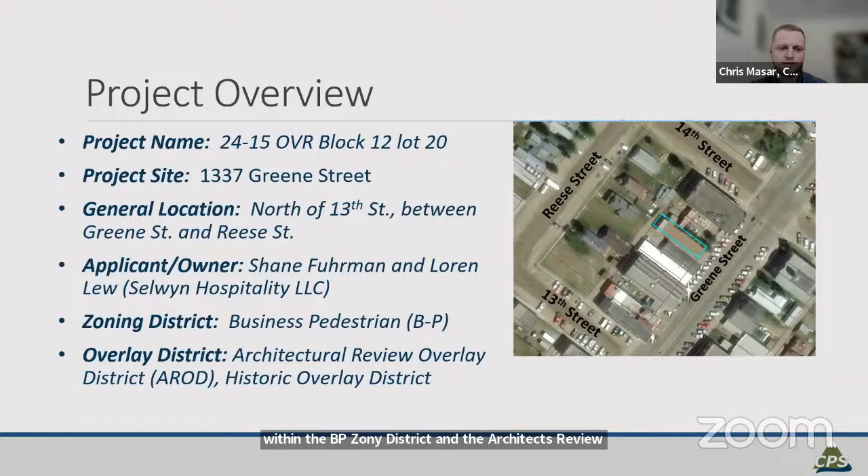All required documents and fees have been paid and it was properly noticed. No public comments have been received to date. The proposal includes exterior alterations on an existing historic structure.

The subject site is 2,500 square feet, and there is an existing single-story structure which fills the entire lot. The second-story addition will be set back 10 feet to preserve the historical front facade and header. The 10-foot setback will also be utilized as a second-story deck. The proposal also includes a new first-floor entrance on the north elevation to provide direct access to the hotel guests to the adjacent courtyard. The building materials include brick facade and vertically oriented windows, which match the existing structure.

This application is before you all tonight because any facade or exterior building alterations on existing structures viewable to the public require HRC review and approval. Additionally, the committee may add site-specific conditions of approval with the intent of retaining the town's historic landmark designation.

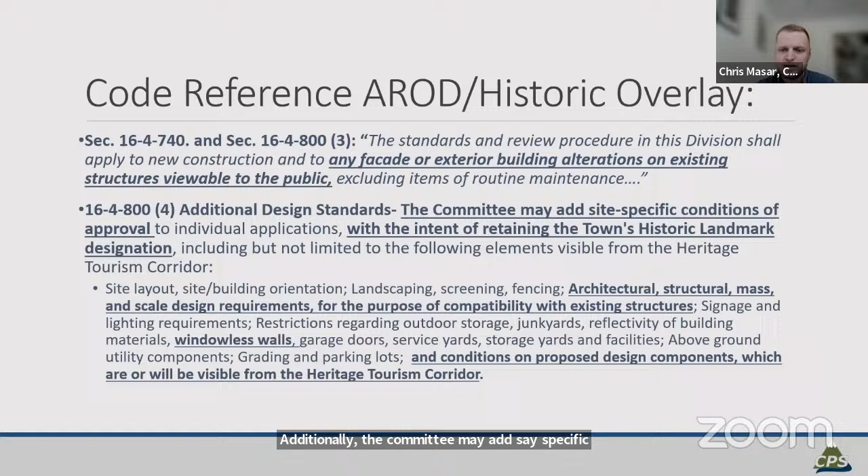Staff reviewed the application against the site-specific conditions and found that the proposed architectural, structural, mass, and scale are compatible with the surrounding structures. The application does include windowless walls. However, on the south elevation, the adjacent structure is located on the property line, and adding windows could impact the future development of that second story. The addition is also set back 10 feet from the front facade, which would help reduce the visibility of the windowless walls to the public.

Finally, the proposal includes a deck along the 10-foot second-story setback, which is unique to this structure. However, there are several other rooftop decks or second-story decks along Greene Street. Therefore, staff does not have any site-specific recommendations for this application.

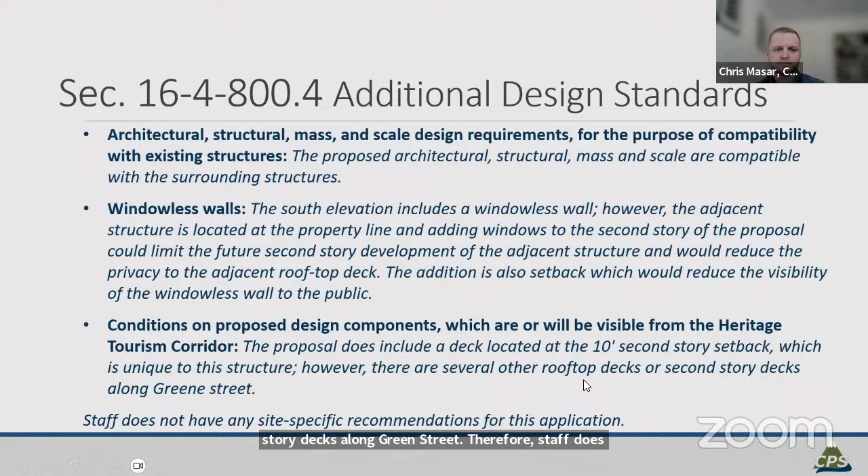Therefore, staff finds the applicant has submitted all required materials, and those materials comply with the conditions of Section 16-4-5 and 16-4-6 of the Silverton Municipal Code. Staff therefore recommends approval of the AROD and Historic Overlay District application for exterior building alterations on an existing structure located at 1337 Greene Street as presented.

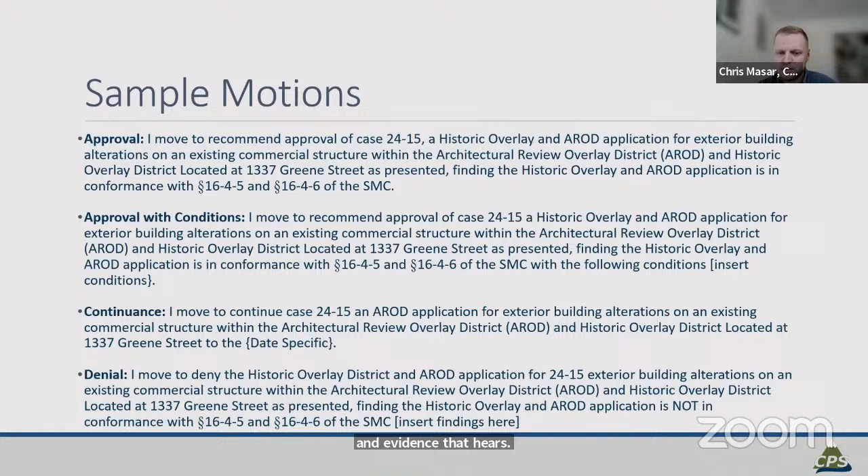However, this decision is up to the Historic Review Committee, and they may choose to recommend approval with condition, continue, or deny the application based upon the testimony and evidence it hears. This slide includes sample motions regarding the application, and these motions are also included in tonight's meeting packet. That is the end of my presentation.

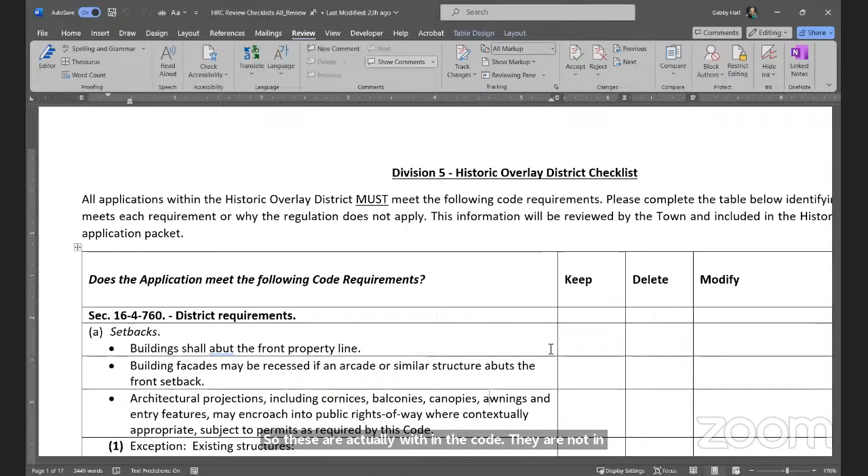So, make this bigger. All right. So the first checklist we have is just the standards for the Historic Overlay District. So these are actually within the code, they are not in the handbook. And so I just planned on letting you all kind of walk through this, and then I can mark keep, delete, or write how we need it to be modified. That way we can get these more on the right track for our next iteration of the land use code. So the first...

Regulations are related to setbacks. Any thoughts here? I'm good with 'building shall abut the front property line.' I don't see any issues with anything here in this first section. Anybody else? Nope. Okay, those are keep. Does that include this exception for structures existing before 2008? Cannot increase setbacks?

I say keep it. Agreed, I don't have a problem with that. Okay. Right. So now we have that.

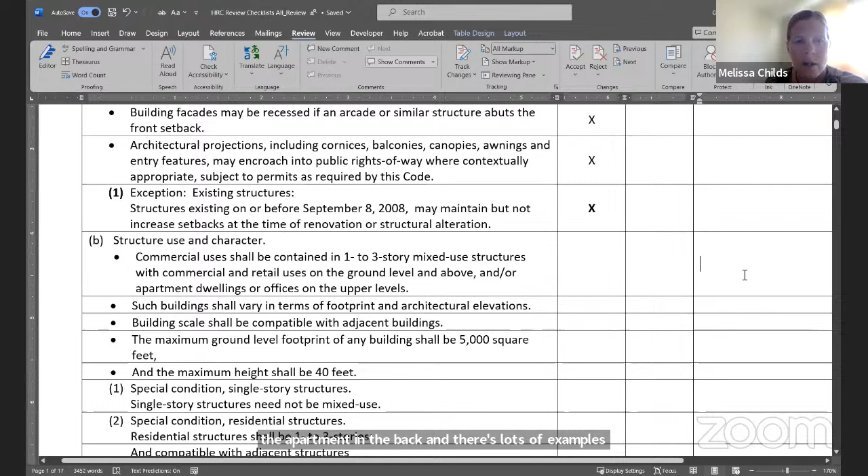I agree with that. I mean, it's very classical to have the store in the front and the apartment in the back, and there's lots of examples of this already in historic buildings. So I would say lose that. Okay.

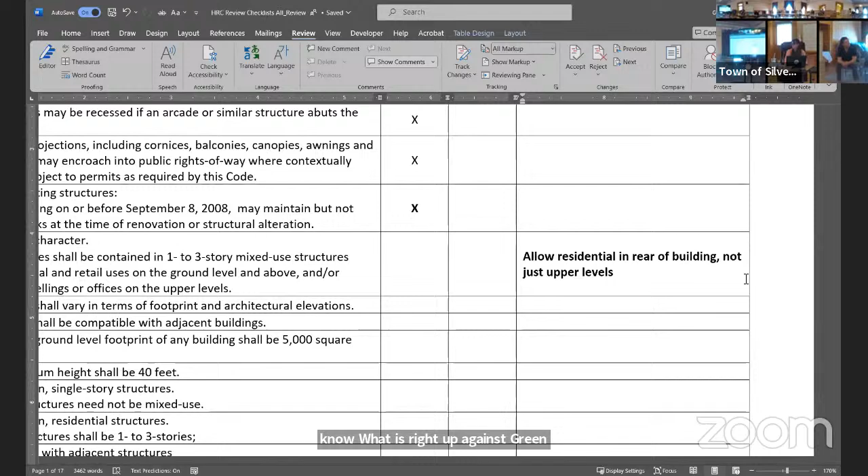Okay, but generally speaking, we do want to keep what is right up against Greene Street non-residential in the historic overlay district. Correct. Okay, Agreed. Okay. All right.

This is kind of a broad item here: vary in terms of footprint and architectural elevations, as well as compatible with adjacent buildings. I personally don't really understand the one about vary in terms of footprint. I don't really understand what that means. Such buildings shall, what, vary from their neighbors in terms of footprint and architectural elevations? But building scale shall be compatible with adjacent buildings.

I say lose that because there's some small little structures on Greene Street, which is our only BP zone, well there's a section of Blair that's BP, but the primary BP zone is Greene Street. And where else are we going to put our larger commercial buildings than on Greene Street? So if you have, for example, and I know of some, a 700-800 square foot home on Greene Street, and now somebody wants to build this amazing mixed use building that's adjacent, but now they're limited because of this rule. I just think we need to utilize our BP zone to its best and highest, and it's the only place for some of these larger mixed use buildings. And so I just don't think the scale shall be compatible with adjacent buildings. I'd like to lose that.

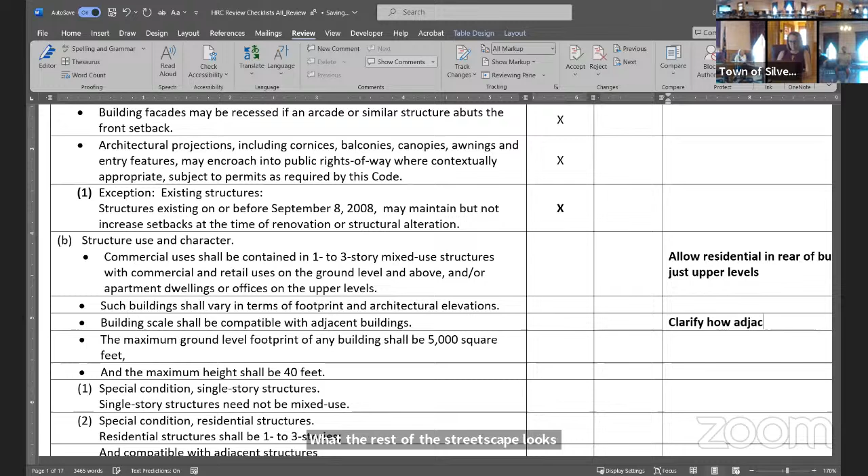So clarifying whether or not adjacent means immediately adjacent, or what the rest of the streetscape looks like, could be really helpful. Because if there is one little building but then two big ones, I think you end up with kind of a reasonable result.

And then the other concern I had is the mixed use requirement. For example, if you wanted to build a hotel that doesn't have a coffee shop or a bar, that would not be permitted. A single-story restaurant doesn't need to be mixed use, but if you had a 2-story coffee shop, like the Coffee Bear, it wouldn't be allowed as it currently is. So there's a decent number of examples where mixed use could be a problem.

That's a good point, Shane. Commercial uses shall be contained in 1 to 3-story mixed use structures. So thanks for pointing that out, because the Coffee Bear does have residential in the back, but you're saying this reads that you could not have just a retail store, for example, or just a hotel without a coffee shop. So I hear you and agree with you on that one, that you're mandating mixed use, which I question if that should be there.

Yeah, because I think there's a difference between saying you can't do a fully residential building versus saying you need an active ground floor space. And you could do that with a hotel, right? Like the lobby of a hotel is an active pedestrian space. So it doesn't mean you couldn't still keep the pedestrian oriented feel of Green Street if you allowed that. I don't know though, would you want a completely office building? As long as the offices had like a front space that was active, or do we need to reserve that for more retail and restaurant uses?

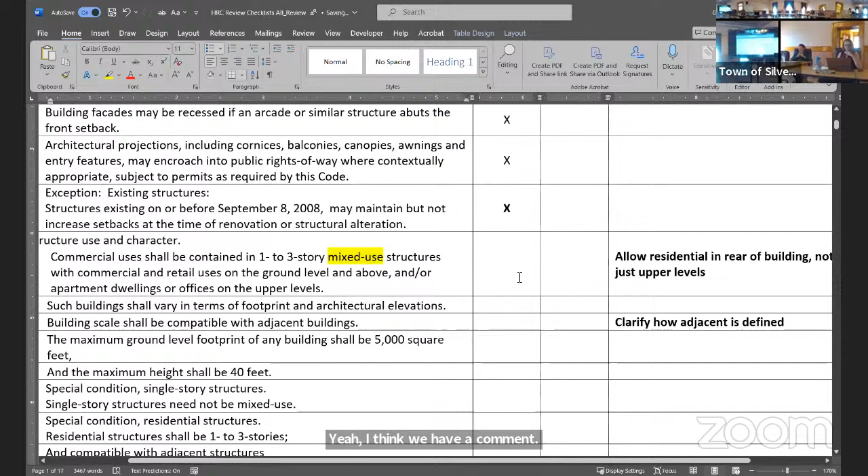I think it's a good discussion because as written, it probably does do what we want it to do, it sounds like, but the fact that it's taking this conversation to recognize that means that maybe there can be some more clarity added.

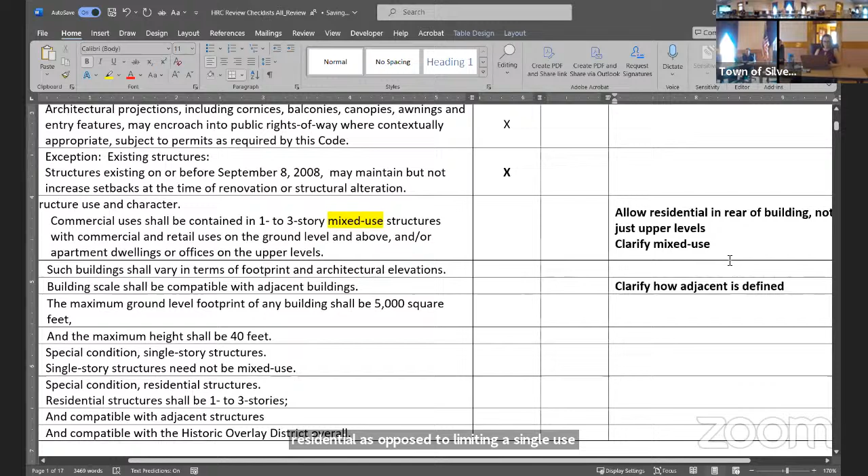I guess I do. I think the main intent was to not allow just residential, as opposed to limiting a single use of commercial. And so that's already captured in the BP requirements, I believe. Is that correct?

For the business pedestrian district - I know they're separate things, but what's captured within that? Like not a purely residential use. Oh, currently you can have a purely residential use in BP. You can't - yes, that's my mistake.

I agree that we could use some more clarity on that statement. Yeah, and that would just take away all these issues. Get rid of them. Okay.

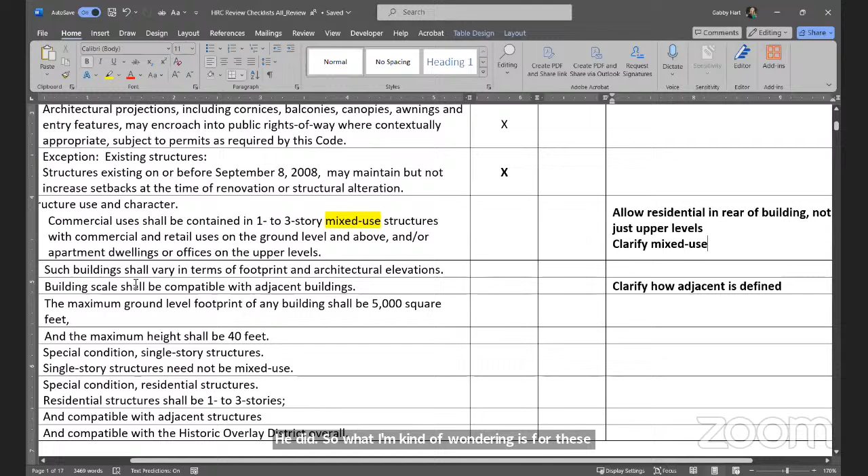So what I'm kind of wondering is for these two - in terms of footprint and architectural elevations and building scale compatibility - remember, we're in the sort of standards that are codified in the actual land use code. What I'm wondering is, are these things that are more so addressed via the guidelines, like the builder's handbook? Do we need to state this in these standards, or do they need to be fleshed out a bit more?

The question of what is compatible is a hard question to answer and usually requires some additional regulations, but as we move down you can see you're starting to get at building scale via your height limitation and this maximum footprint. I don't know if you guys have any thoughts about that. If we removed those, would you be comfortable knowing that those issues are addressed in the handbook? Would you rather they stay here in the standards?

And Gabby, can you quickly give a really brief overview of the difference between standards and guidelines? Yes, so your standards are the absolute, the shalls, versus guidelines are guidance - you don't necessarily have to follow them. You all as the HRC have the ability to use those guidelines to make your decisions and make suggestions and conditions and things, but fundamentally these standards are these set rules.

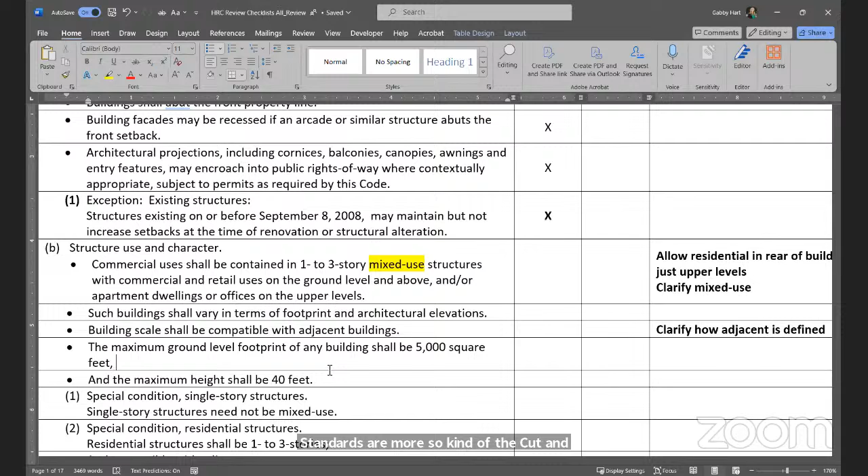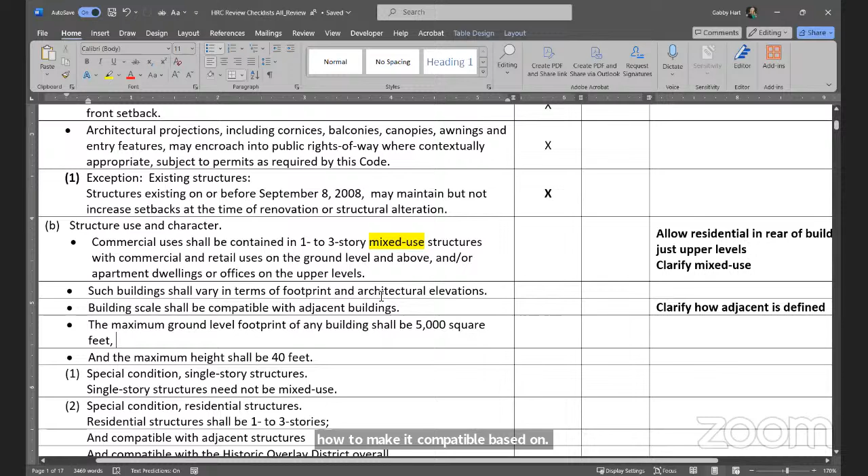And so oftentimes, especially when it comes to historic design, standards are more so the cut and dry dimensions or building form - things about mixed use, height, footprints - those would be standards, versus the guidelines would give you some options on how to make it compatible based on historic conditions. Is that helpful? Yes.

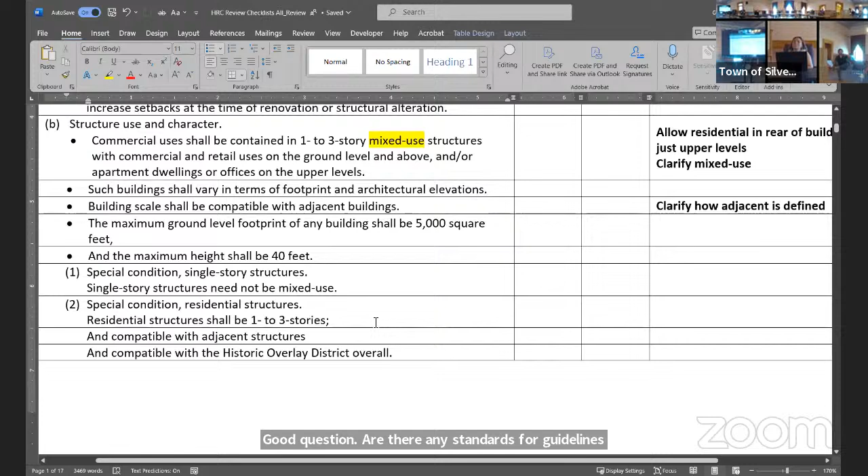Good question - are there any standards or guidelines that go towards becoming a Main Street community, or preserving our historic designation?

Yeah, Main Street Community is a San Juan Development Association kind of project. And then we have our historic overlay district, which is for historic preservation. And then we are working towards becoming a certified local government, which is kind of that next step to historic preservation that I think includes a lot of the things that are probably in your mind right now. So a big part of this code update is getting our standards and guidelines updated so that we can become a certified local government and implement these historic preservation principles effectively.

So a work in progress.

Are we ready to move down the list, maybe? Yep.

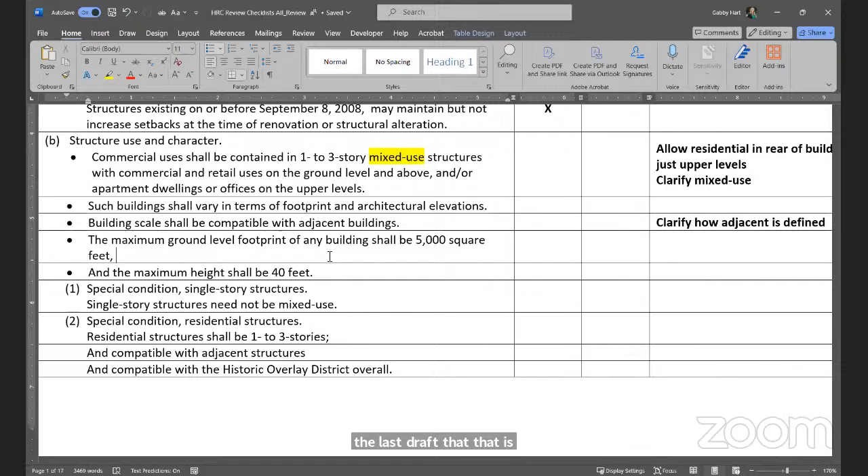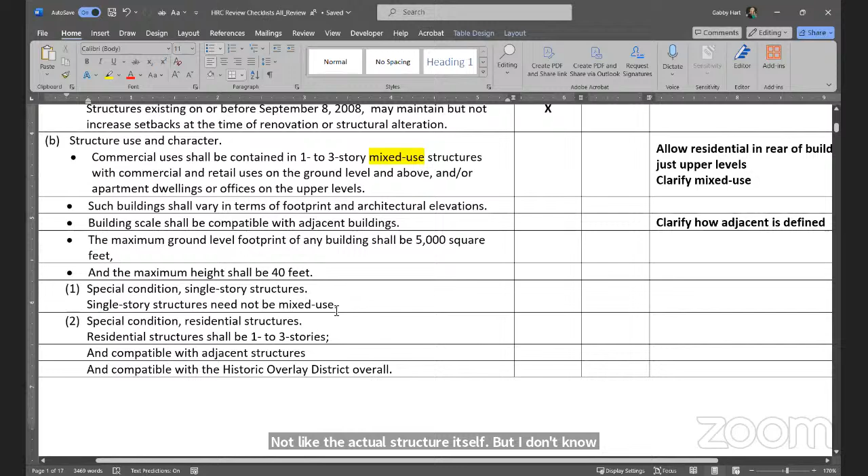This maximum ground level footprint, we did clarify in the last draft that it's related to a tenant space, because we understand that many of the actual structures, the buildings, are larger than 5,000 square feet. But if you wanted to keep that, we said the tenant space is limited to 5,000, not the actual structure itself. But I don't know if you're interested in keeping that restriction. Can you clarify that difference? Yep, so if you had a building with shared walls between each space, where they look different from one another from the outside, they're segmented, that's still fundamentally one building since it shares a wall.

So this was confusing because it said the ground level footprint of any building should be 5,000 square feet, versus we think the intent was more so related to each of those storefronts, each segment of a building, should be limited to 5,000 square feet in footprint, so that there's not one use taking up a decent portion of a block.

I think we've got another comment from Shane. Yeah, I was gonna say when we were first talking about this, we were just talking about building footprint, not limiting tenant space. For example, the Wyman's 10,000 square feet. The Bay Paul that we just approved is gonna be like 7,000 and change. The Grand is like 23,000 square feet. The Benson's way over as well. And there's a bunch of other properties that are way over 5,000 square feet for a single tenant.

And so I think - are you talking about this ground level footprint? Correct. Yeah, that's what we're talking about. Okay, so yeah, footprint - I'd say remove it.

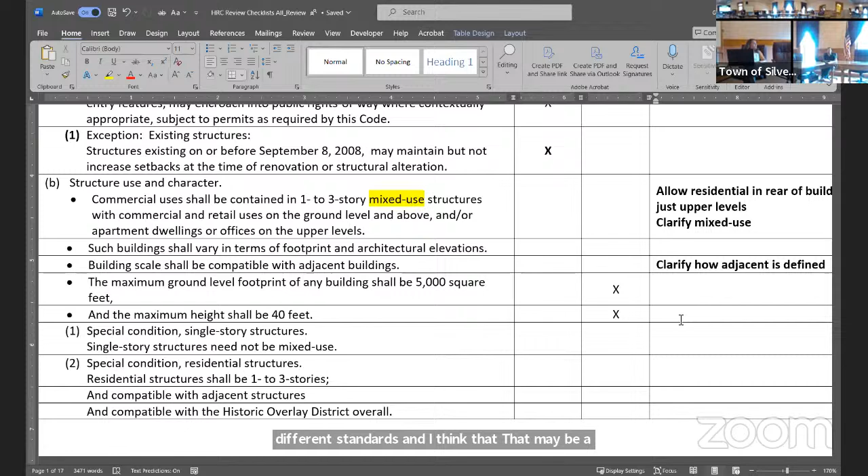I still do think that I totally agree—really tall buildings, even just by a little bit, can totally change the character. But I do think that we should seek alignment between these different standards, and that may be a bigger topic that doesn't fall within this right here. But if we want 40 feet, then I think it should say 40 feet across the board.

Yeah, and this is something that we can—we're bringing the full draft of the land use code, which will include these standards and the dimensional standards for all the districts, including the BP. And we can ask that question specifically about 40 versus 45 and get public input on it too, and see where it goes, and then revisit this based on that.

But I do think it makes sense to just follow the maximum height of BP. The land use code is still being drafted, so 45 is not a set number. That can come down, especially if we hear even more input about it.

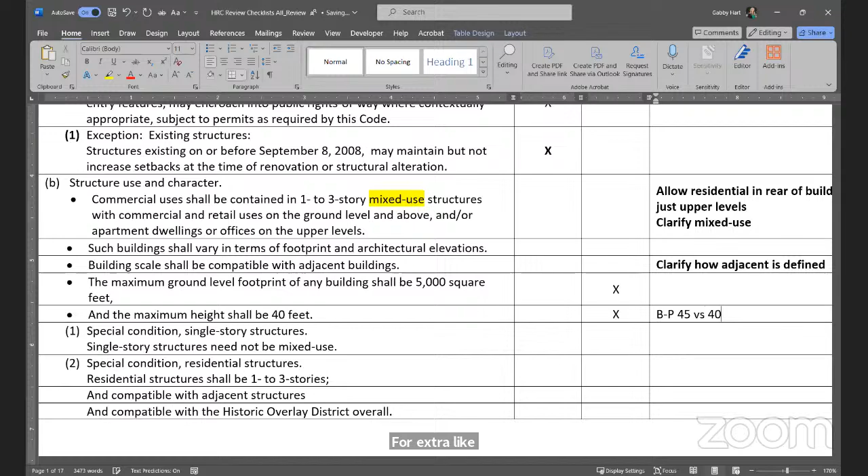So we'll flag that as the BP 45 feet question. We will flag that for extra input. Moving down the line here.

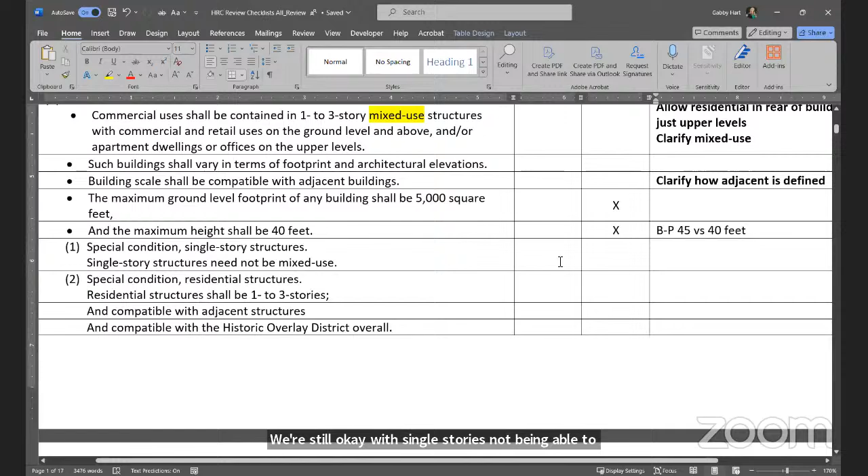We're still okay with single stories not being able to be mixed use, especially if we're not even keeping the mixed use distinction up there. Correct. Okay.

So for residential structures, one of the recommendations we have, also related to the BP district, is that single family detached is not an allowed use anymore.

So this is also a little confusing amidst any mixed use requirements you have. I guess the way to ask this question is, would you be okay with a completely residential building? So a duplex or a multi-unit?

I'm in favor of multi-unit. We obviously need as much residential as we can get. In Silverton, density seems to be the overall theme that came out of the compass plan, the master plan. So I definitely think a strictly residential building on Greene Street is okay. But I don't know that a detached single family is. I would say no to that.

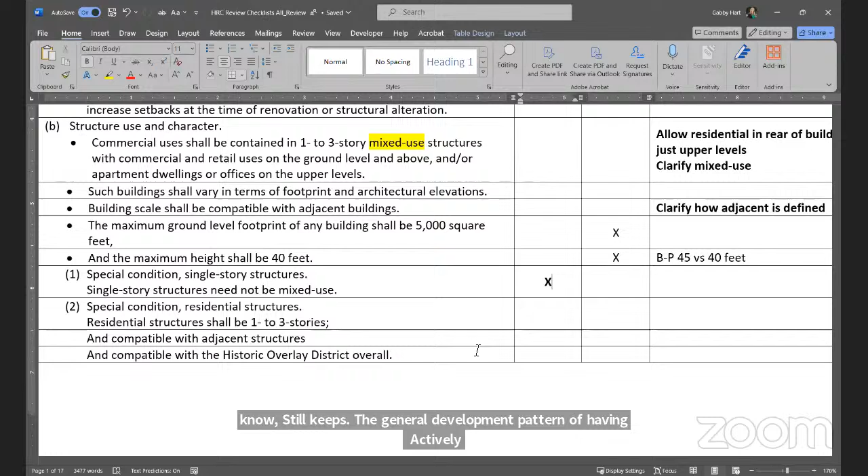But so the question we always kind of run into, especially on main streets, is: if you want to do a multi-unit building, should we at least have the ground floor be a leasing office or something that still keeps the general development pattern of having active use and in-and-out activity? Or, if this is your main space that you want commercial, and we're opening up opportunity for residential elsewhere in town, should you not be able to do an entirely residential building? You can do multi-unit, but the ground floor needs to be a coffee shop. That's the balance we're trying to find.

So I like the requirement of, now we're reintroducing the mixed use requirement, I like that a residential unit have some kind of pedestrian connection, commercial use on the main street there. So I'm okay with that. I guess what I'm not okay with is the detached single family unit.

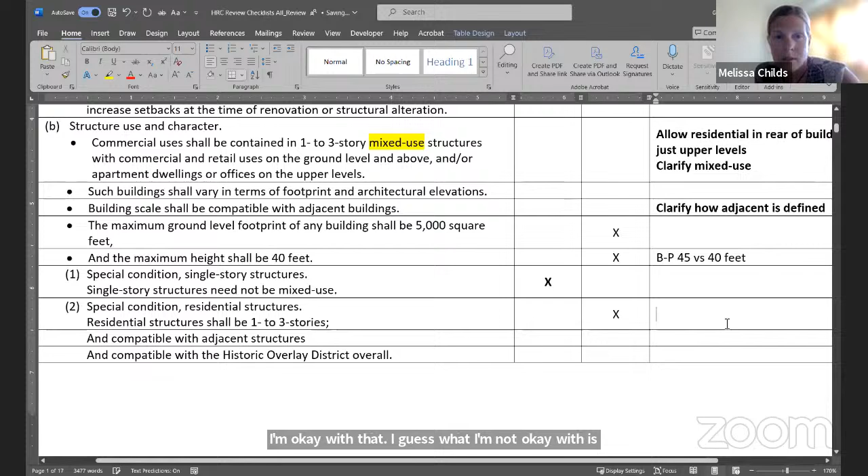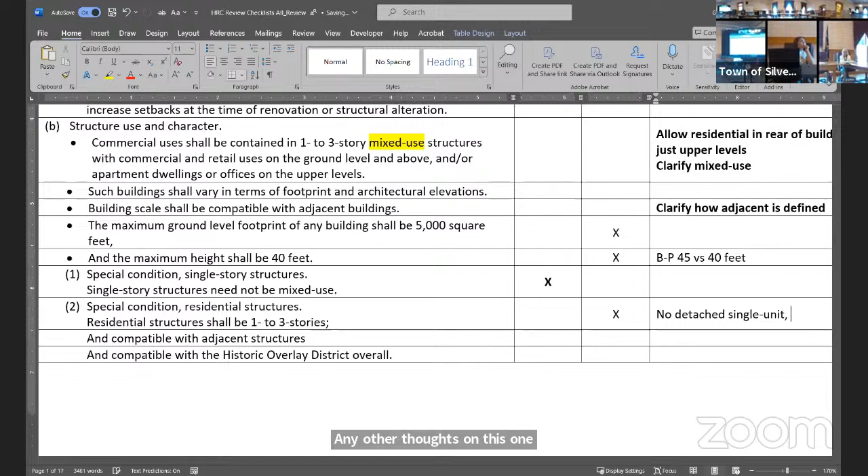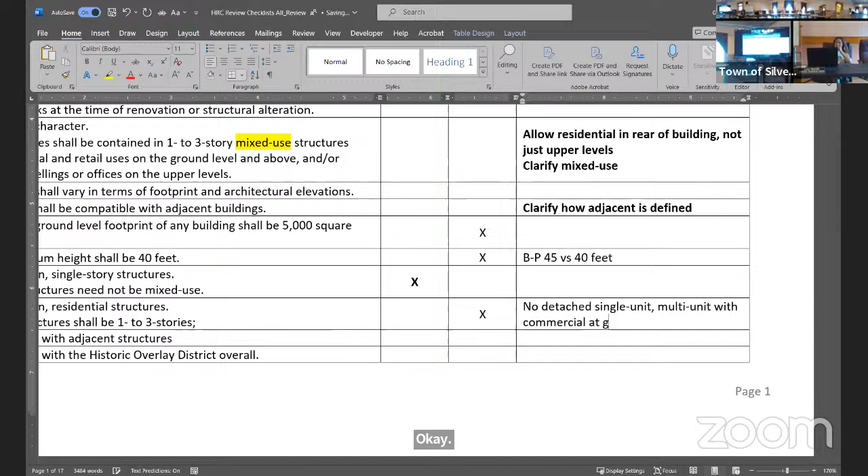Any other thoughts on this one? I believe it should be mixed use. Okay.

And then this is kind of repetitive, if we're taking this out related to residential structures, then these can also go. These are directly tied to this one.

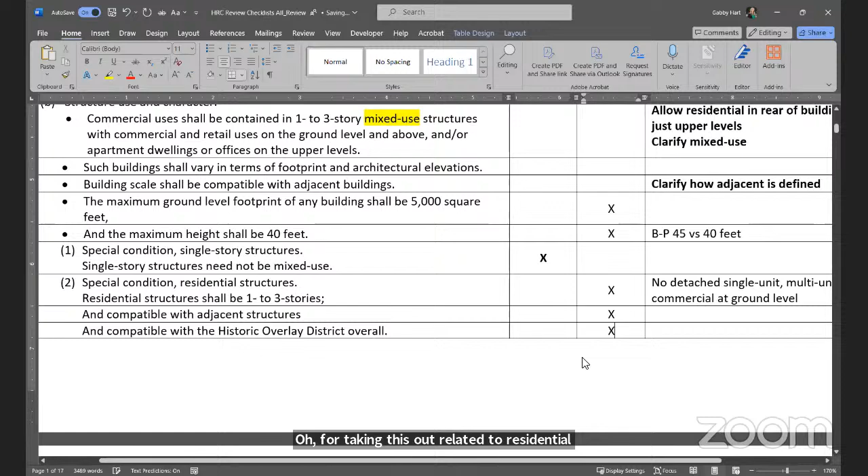So the next is facade treatments. This is the 25-foot articulation requirements.

I agree with that. Somebody explain that to me.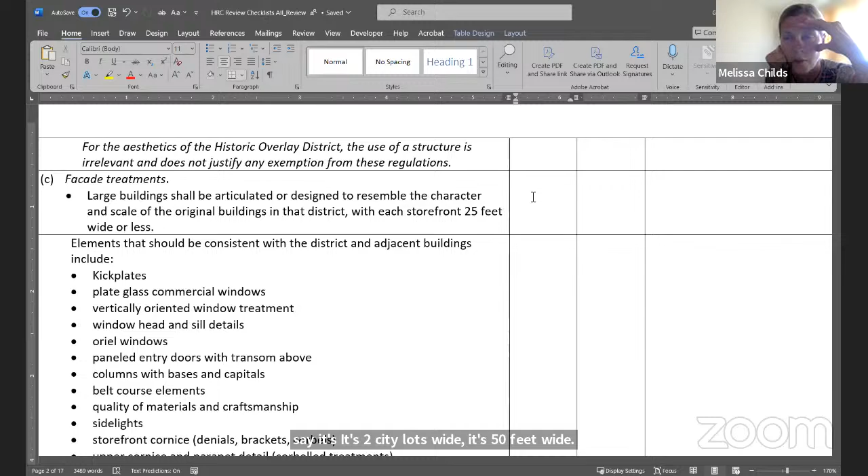It's number C on here. So, every 25 feet, if the building is, for example, say it's 2 city lots wide, it's 50 feet wide, you can't have a continuous facade across the 50 feet. You'd have to make it appear as 2 25-foot wide buildings.

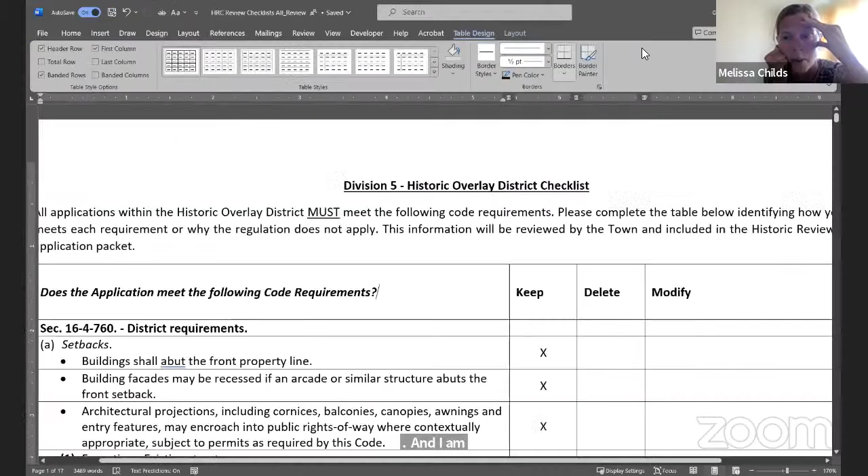Gotcha. I'm opposed to it. It's faux, right? And there's lots of examples of our historic downtown buildings that are wider than 25 feet.

So at a minimum, I'm against it, I would delete it. But if we want to keep that, I would say increase that number to at least 50 feet. I'd agree with that.

Yeah, I support the intention of that. I think that 25 feet seems really small.

And there's plenty of buildings that are 2 lots wide and they make no pretense of looking like 2 25-foot wide spots. We already have that.

Okay, so we'll increase that to 50.

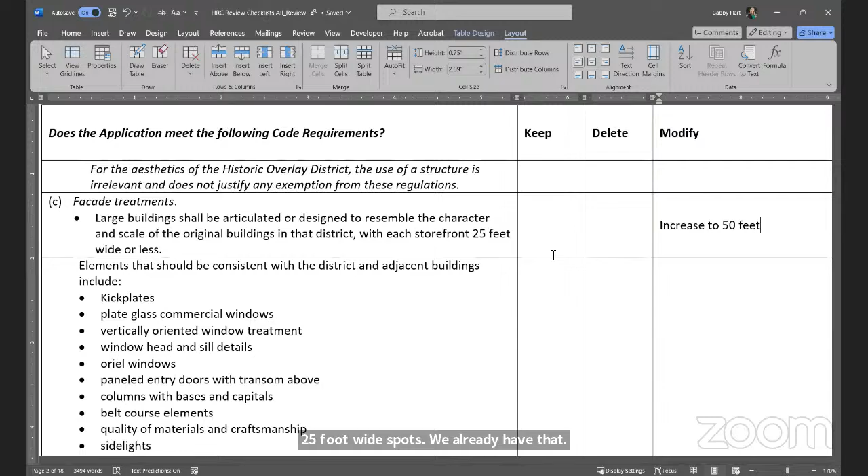And then you have this, well, it's interesting because this is technically a should statement instead of a shall. And again, pretty open-ended. My question for you all is, when you're looking at applications, are you going one by one checking this, or how do you read this criteria and apply it?

I definitely think it should be a should, not a shall, because some of these are so particular. And this makes me want to, I have it queued up.

I don't know, I wasn't planning on interrupting this agenda item with it, but this brings to mind the conversation we had at the last historic review meeting, where the architect, can't remember his name right now, but they were looking for the house down at the entrance of Green Street. And he had a real great comment about mimicking new construction, mimicking Victorian construction, and how it actually devalues the historic Victorian or whatever it may be, because now you're looking at them and you're questioning: was this built in 2020 as a replica of a historic building, or am I looking at a historic building?

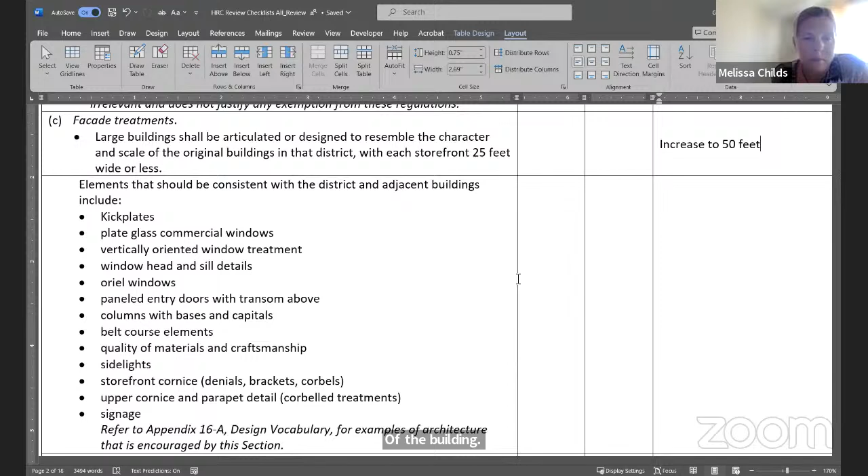Any other comments from the committee? I think this one makes sense as a should, and it's a useful list. I think we keep it.

I'd like to change this to should also. But then each application would be looked at as an individual application.

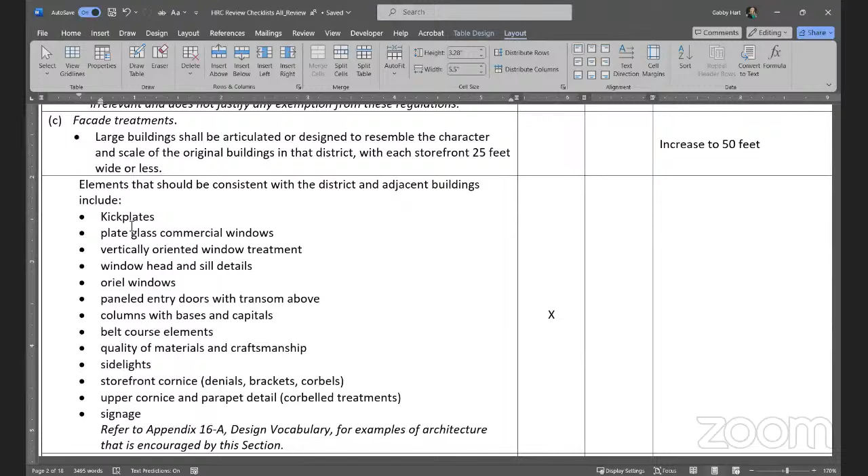Shouldn't that be true anyway? Hopefully. Well, maybe it's a matter of changing this intro to saying elements that may be reviewed, that may establish consistency with the district and adjacent buildings. Yeah, sounds good, consistent.

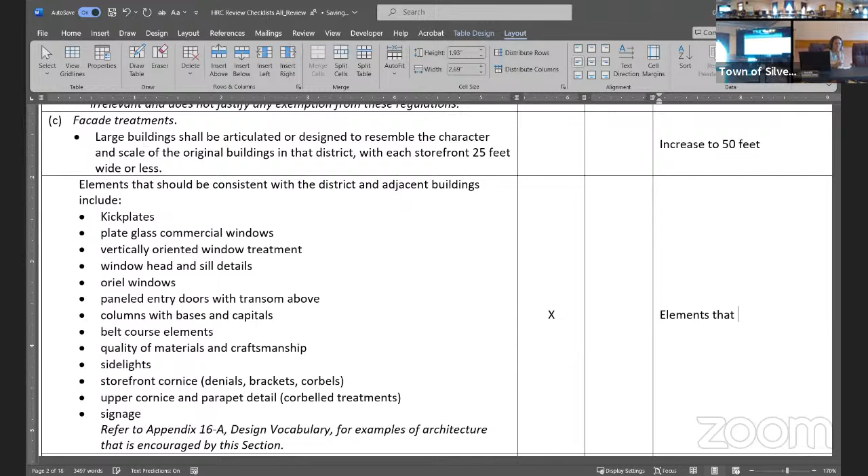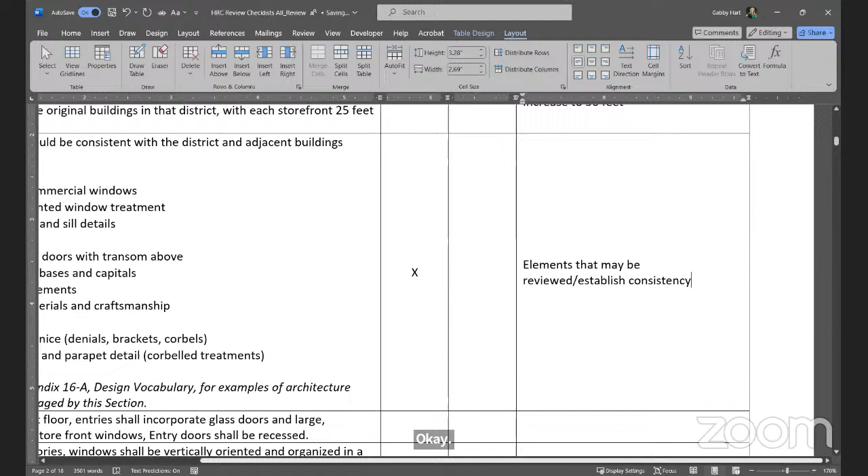Okay, so then we've got entries, windows, awnings and canopies, and screening. So entries is that it's incorporate glass doors and large vertically oriented storefront windows, and that entry doors shall be recessed.

Again, I would prefer that this was a should, not a shall. Because I do think that they should incorporate these things, but also if it were a completely new build, again, are we wanting to mimic or respect the old?

So I would just say that I would prefer it would be a should. Does that include the recessed piece, or should that still be a shall? Oh no, that would include the recessed. Okay, and I also think that should apply for the windows personally.

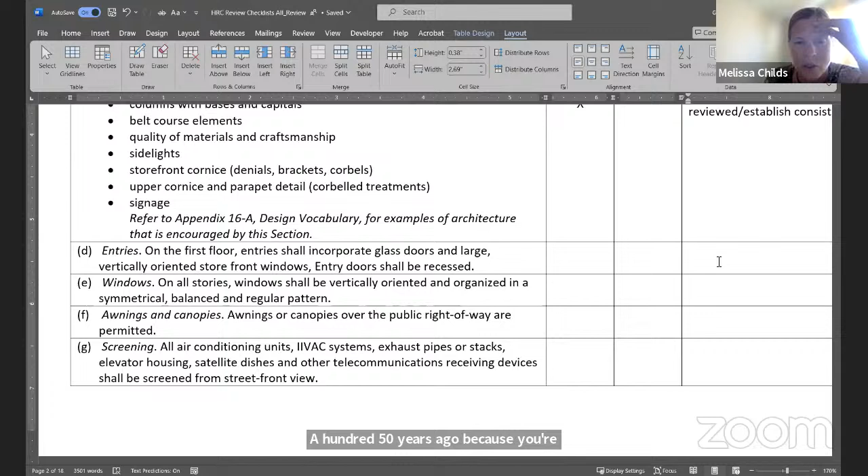Again, going back to the architect's little spiel about, you know, you don't want to make something that looks like it was built 150 years ago, because you're actually taking away from the thing next door that was built 150 years ago. So I agree with that.

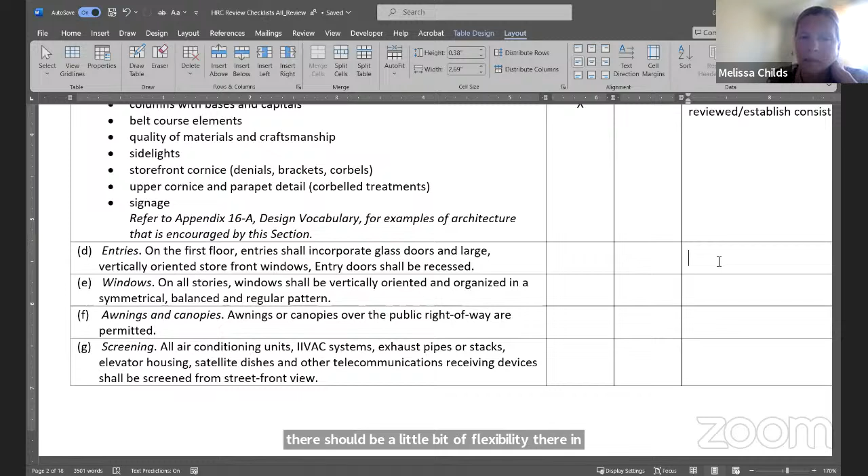These things are good things, the vertical windows and the recessed doors, but I think there should be a little bit of flexibility there in case it is a brand new build and we're not trying to mimic. But the problem with not having a recessed door on Greene Street, Main Street, is if someone walks out of that building and they run into people walking down the street.

You need to have a little bit of leeway so the people leaving the building can see someone's coming and they don't just run into them. So I think that makes complete sense to have recessed buildings on Greene Street.

But are you okay with that? Should it be recessed just to give us a little flexibility? Well, I think we have to be careful with the word shall and should, because we get into some semantics here, and I don't see anything wrong with the word shall on this one.

Well, that just really affects the architecture of the building. To have a recessed door? Yeah, that changes a lot for the overall design of the building.

Okay, but that's the way a lot of the doors are in Silverton, most of them. And I don't agree, I think we should lose that. I don't think we should lose that. Okay, well, we disagree on that. I would like to see some flexibility there.

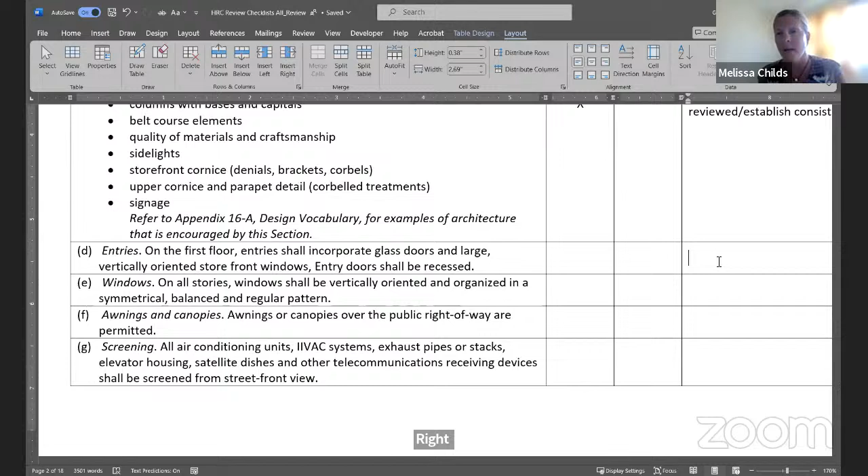Personally, I do agree that recessed entry doors should be encouraged. But I don't know that they shall be required, is my point, to give flexibility to a new build. I think they shall be required is my point. Right, and we disagree on that. So if anybody else has any opinion there, please speak up.

Somebody's got an opinion. I have a comment, and I don't know if it's anywhere in your guidelines. You probably have purview over which way the door opens or closes also. If I'm not mistaken, historically doors open inside because of the snow. It was hard to open doors outward.

So I don't know if this is in there anywhere, but that may be some common ground also, where if doors open inward, that depends on whether the entranceway is inset. If the entryway is recessed, then you have a little more flexibility as to the door coming out or in, so it won't affect traffic on the sidewalk. So there's variables there, obviously.

Okay, well, there's variables in everything, and I guess we have to just consider that every applicant is individual and unique, and we have to look at that and consider their uniqueness. Right, but they have guidelines, we all have guidelines.

And I think that changing something like this to should, it doesn't at all remove that important consideration. It just means that if somebody comes with a compelling application that does not meet that, we have a little more flexibility. But then they also have flexibility to say, you just said shall, not should. Right, so we have to be really careful with the way we word things.

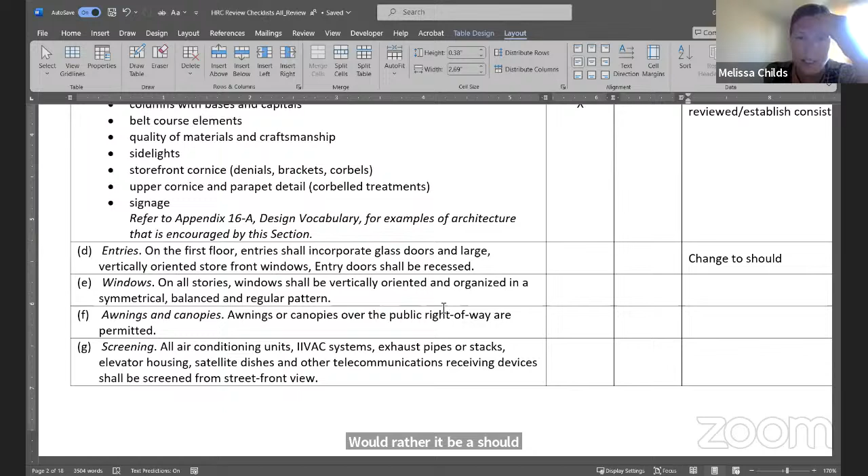I'm wondering if the same thing applies for windows. I think so. I agree that they should be vertically oriented, I agree with that statement, but I would rather it be a should than a shall, just in case. Again, we're not trying to make a replica of historic architecture.

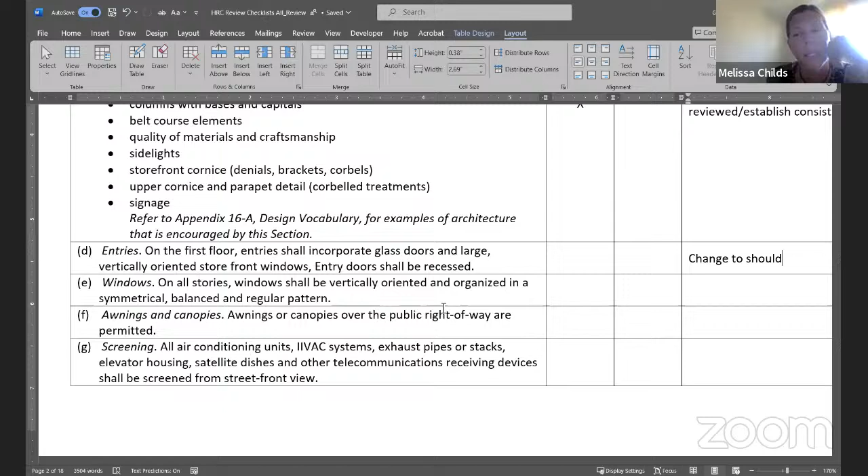An applicant can always make the case why they don't want to respect the shall also. A shall is a shall, I believe. A shall is the law. It's just a little harder to get around, especially once we adopt more standards. That's why I think we should keep it, because people have a tendency to try to get around things. Some people are smarter than the average bear, they know how to manipulate words, they know how to manipulate committees.

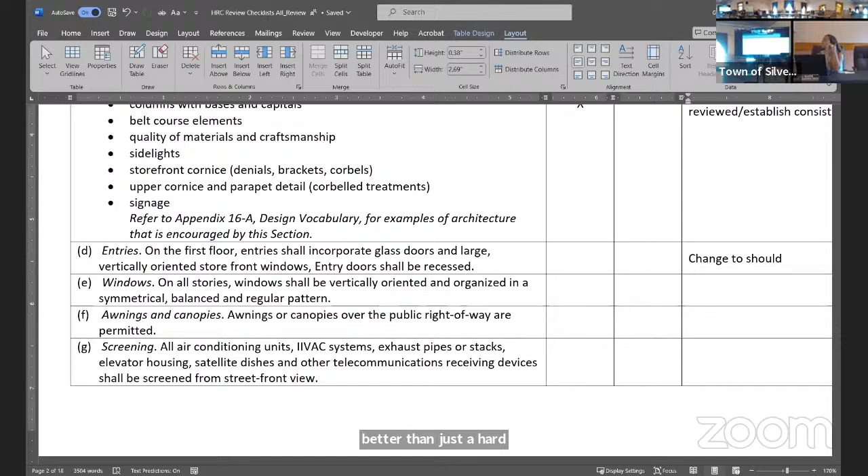So maybe this is more so keep them shall, but we need to write in the code the ability to request some adjustments from that, based on a set of criteria about it still being consistency, but allowing for creativity. So we could keep them shall, and then they make the case that they want to be more creative and they have the ability to do so. We can make that part of it. That's where the case by case basis comes in, which is better than just a hard stop. So yeah, that might be a good way to go. Okay, so we will keep those, but we will add the ability to request adjustments to it.

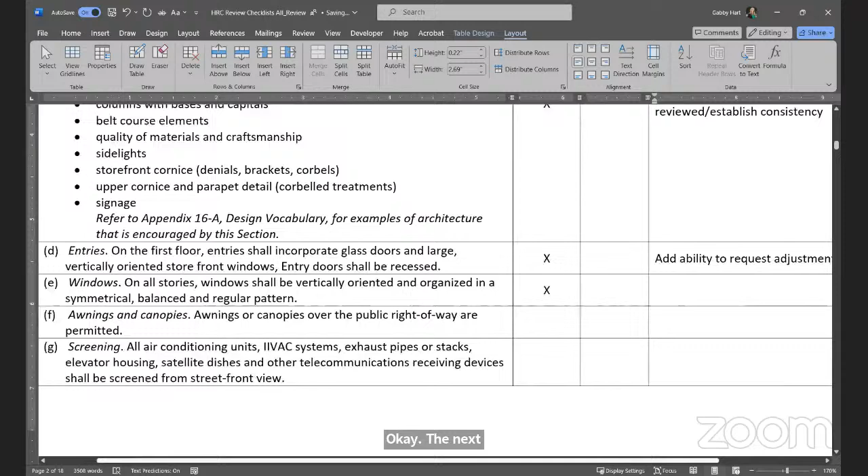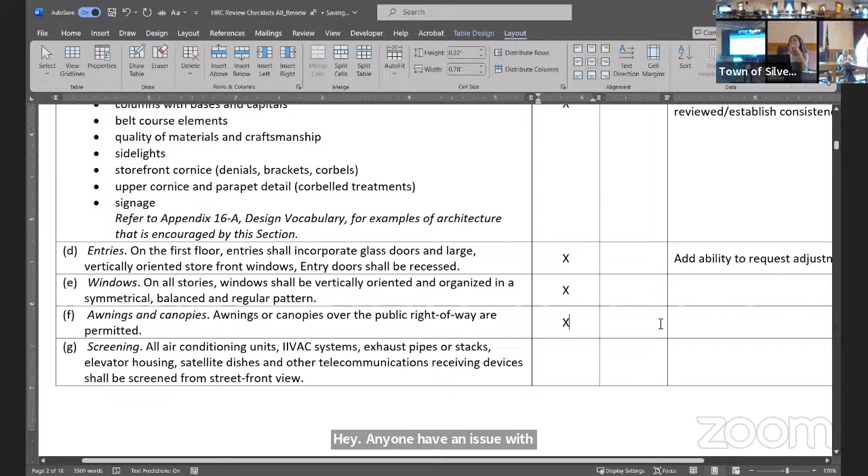Okay, the next one is just saying awnings or canopies over the public right of way are permitted. Yes. Anyone have an issue with that? Does anything need to be added to that or no? Any issues with awnings and canopies? No. Okay.

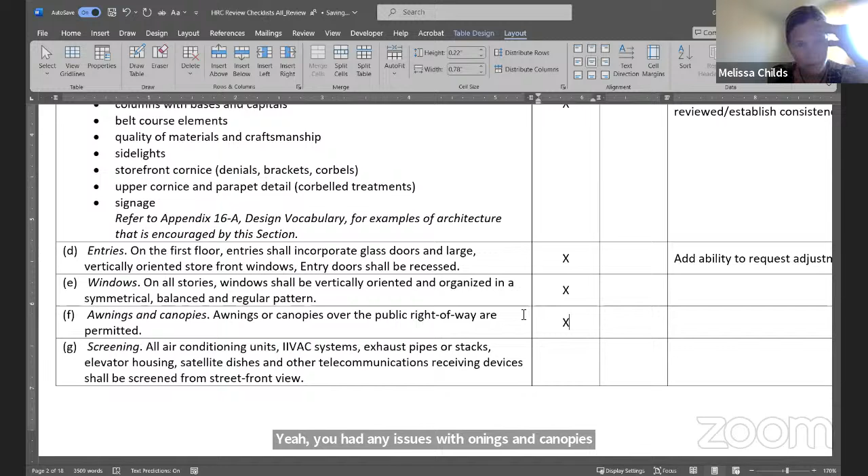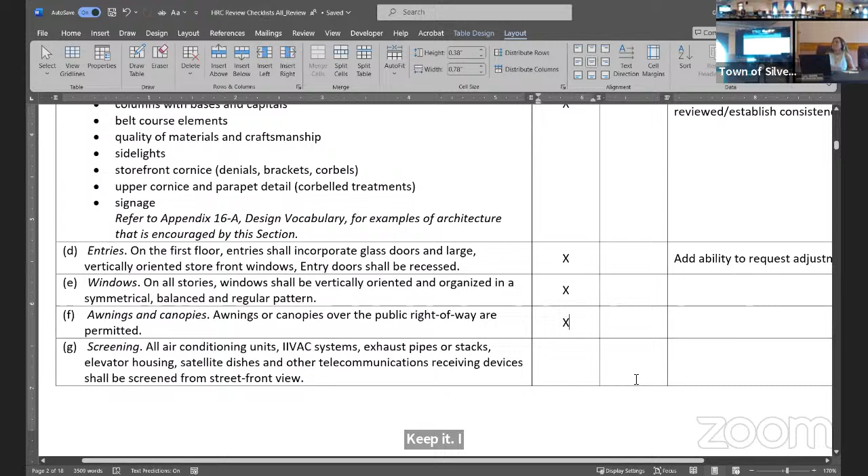Screening of mechanical, elevator, satellites screened from street front view. Keep it, I say. The awnings and canopies, is that both front and rear?

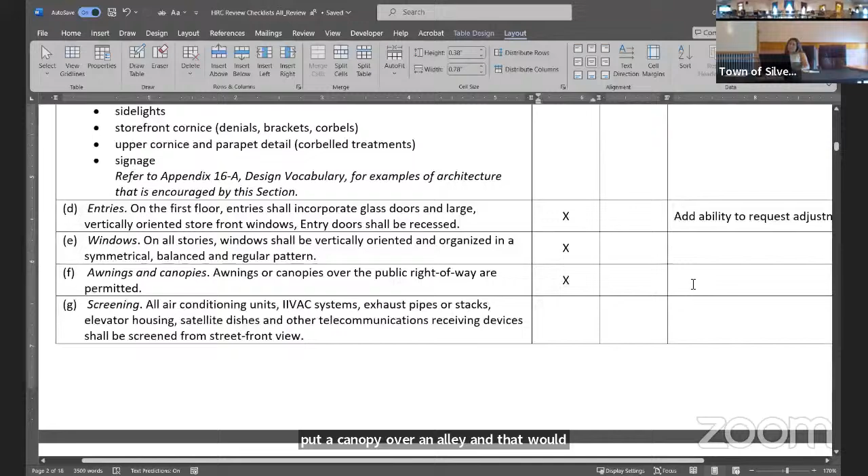Yes. No, you wouldn't be able to put a canopy over, well it reads public right of way. My first thought is that you would not be able to put a canopy over an alley, and that would come down more to a public works decision. So nothing's allowed to go beyond this setback. Like I have a building I'm developing, we have a 5-foot rear setback. It's my understanding nothing can protrude into that setback, even if it doesn't go over the right of way. Is that incorrect? No, that's correct. The awnings and canopies, the intent of that code was going over sidewalks on Blair Street.

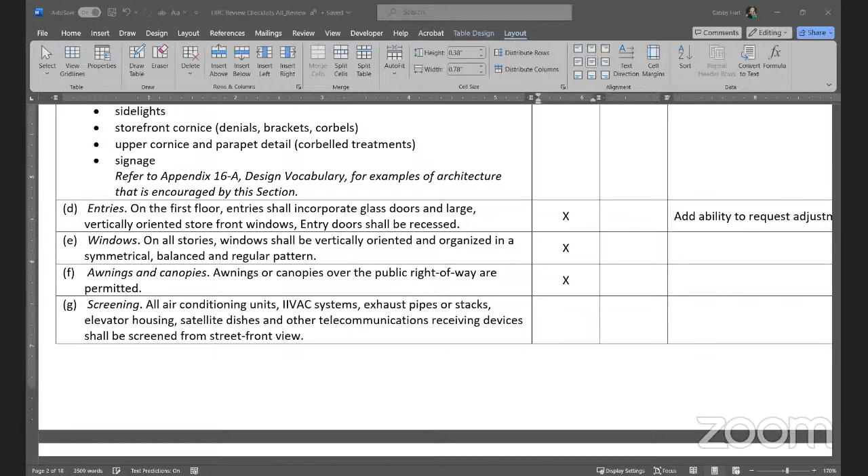So if I have a door out the back of my building, and my building is to the rear setback of 5 feet, can I put an awning over it? That's a conversation we should probably have with the building inspector. Yeah, I just didn't know if there was clarification in the code about that. So that's really where my question stems from. Yeah, I think what you're getting into is more of a setback question, and this is more of awnings and canopies are allowed over like a sidewalk. But we can talk about that at a later time for sure. Yeah, and right now in the land use code there are suggested permitted setback encroachments, but it's only front and street side, so it doesn't address that rear issue. Again, for a later time.

So we're good with screening.

Okay, and then blank walls. I think we have heard that this publicly viewable standard is challenging to interpret sometimes. And maybe also the way this reads now, like with the application in front of us this evening, windowless walls are appropriate when there's no setbacks in your building plan because somebody's going to build next to you and a window is a problem.

So that one's tough. I think you should have windowless walls if you know that someday there could be a party wall built next to you, or a shared wall or an adjacent neighboring wall. I just don't think this works for the lot line to lot line development on Greene Street. And you could argue those aren't publicly viewable today, but they won't necessarily be in the future.

Because absolutely, if it's a corner or it's Greene Street, then no way should we have windowless walls. But if you're, Ben, sitting in the audience there, that is building a building that someday is going to have lot line to lot line buildings next to him, then a window doesn't make sense.

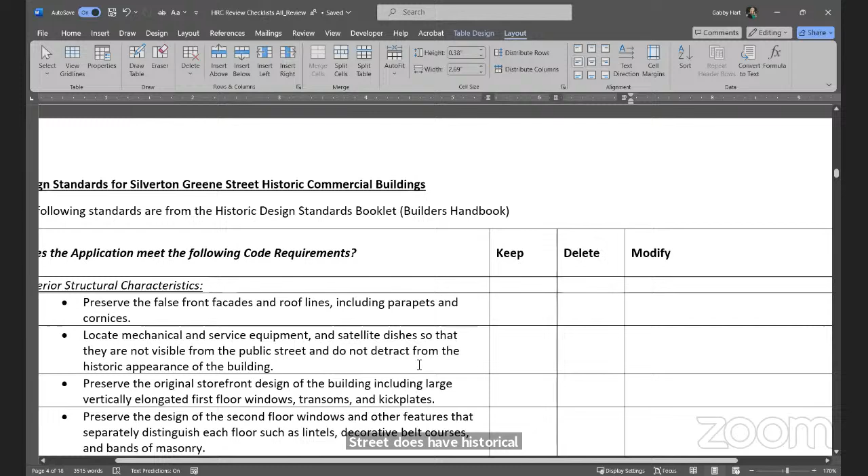All right, and so the next checklist covers all of the different builder's handbook guidelines. I will say there are some repeats or very similar language between things like the Greene Street versus Blair Street. An overarching question we have is ultimately it would be great to not distinguish between the two, but we know that Blair Street does have historical characteristics that are different than Greene Street.

So, yes, thank you. And just something for you all to know, we've been talking a lot with staff about this, especially in conjunction with that CLG certification. The concept is maybe for now we don't use the builder's handbook, but we defer to the Secretary of the Interior standards, which are very common and very well known across historic preservation work and building. And then if the town wants to create something a bit more personalized for the town's guidelines, then move into that.

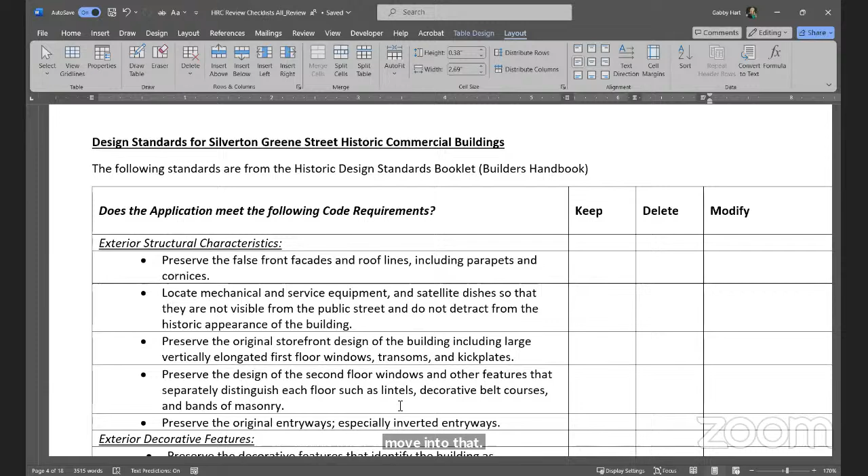But I would be curious to know which, if any, of these types of guidelines have served you well, or if most of them are just pretty vague. Just want to get your thoughts on if there's any content of the builder's handbook that you feel works well for design guideline purposes.

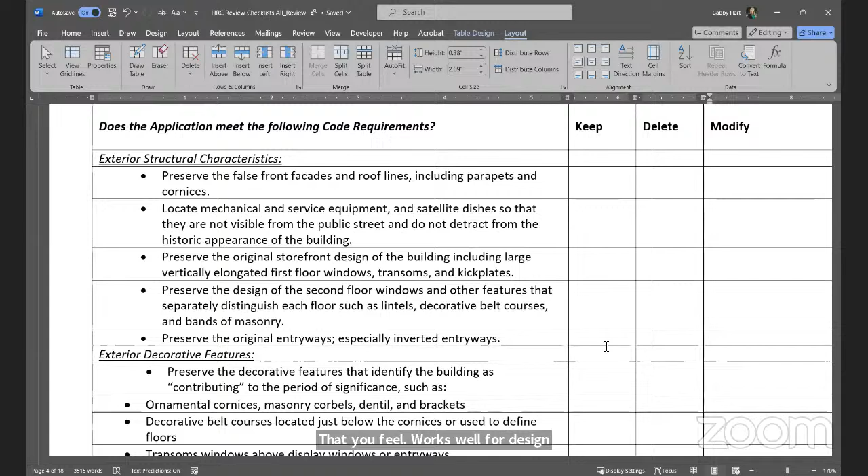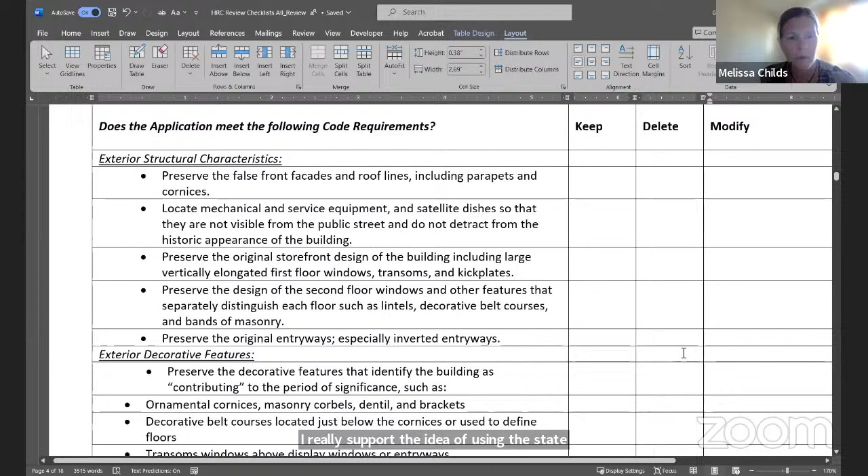I really support the idea of using the state historic guidelines. Okay, I agree.

Well, and I mean, that's again a common thing and would keep you in line with all of the requirements. It would just be a matter of making sure, when and if this gets through adoption and it moves that way and shifts to that, you all are comfortable using that new document, those new documents to do your reviews.

But it sounds like for now we can suggest that, and when we post this for the public, we can include a link to those Secretary of the Interior standards so anyone interested can go look at that. Those do allow for interpretation of things like Blair Street, the balconies, the boardwalks, that sort of thing. That would be captured within those standards, so you wouldn't need to worry about losing that.

Does that sound okay with everybody? I won't make us go through these checklists if that's the case. I think that sounds great. Okay.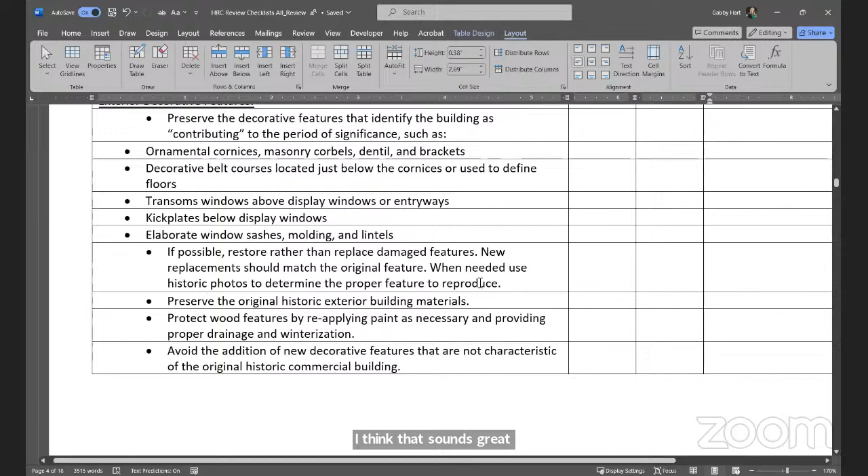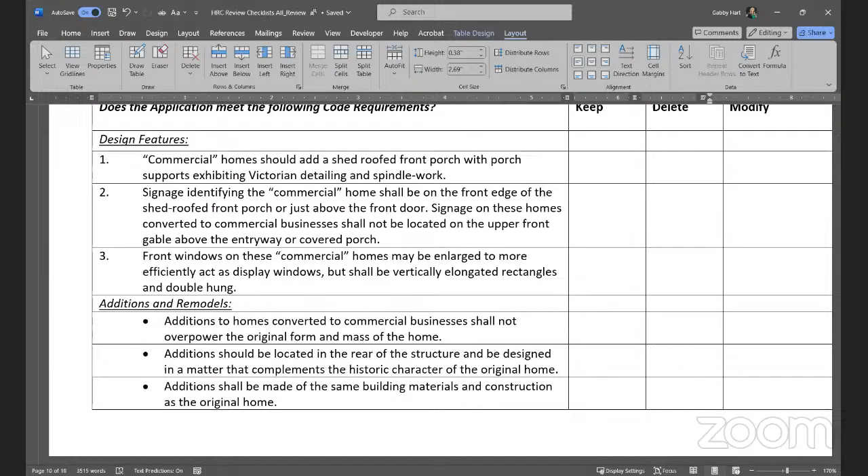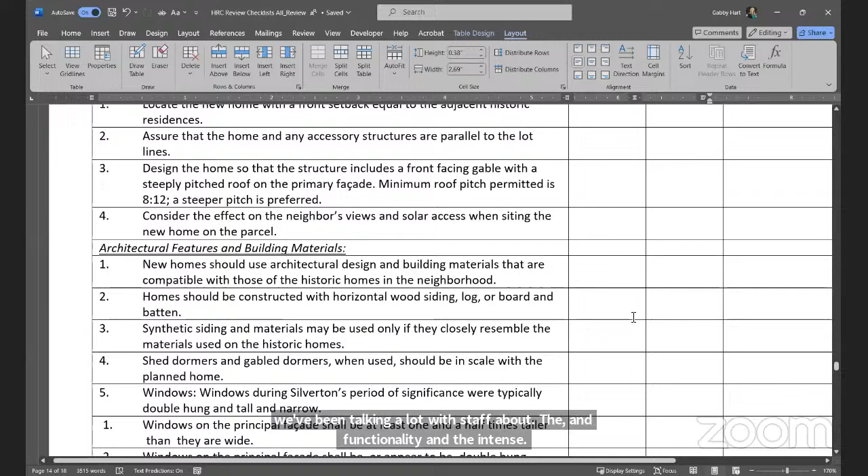So then the last checklist we have is for the architectural review overlay district. We've been talking a lot with staff about the AROD, its functionality and intent. Our question for you all is related to, like we talked last time, it's kind of this historic-light district. It's not the full historic district, but Green Street is clearly important and is the entrance to the town.

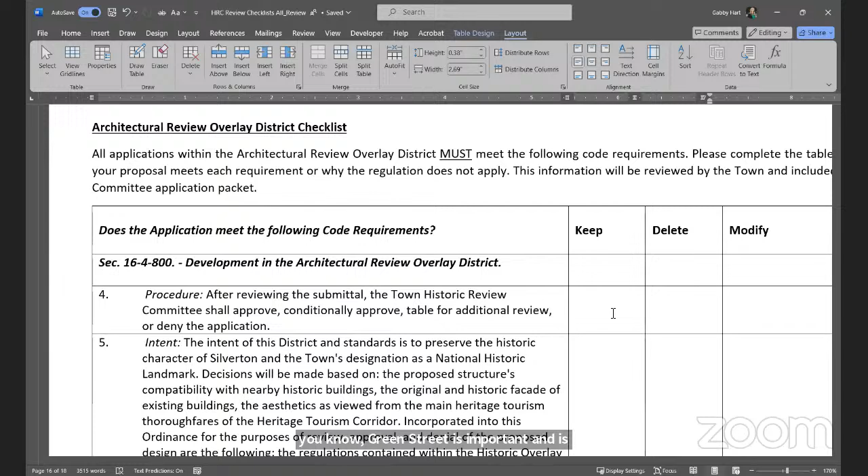But so with using this checklist, I'm curious what comes out of your AROD reviews that you think is most meaningful. It's pretty open-ended here, what you review for.

The direction we'll be moving in for this next public draft is having standards for Green Street, like abutting Green Street, before the historic district and outside of the historic district, but not overlapping - we want to remove that overlap. We want those to keep things generally historic, but not the full-blown historic review. We did a lot of research about other similar communities where the entirety of the town is designated historic, things like Georgetown, Colorado, Cripple Creek.

Ouray, no, maybe not Ouray, and Telluride. They actually all kind of have a tiered system of looking at their core historic district like you all have, and then having some general design standards throughout the town. But for our purposes, we're trying to figure out what you want to look at for those Green Street properties currently in AROD, and what is important to regulate on those properties.

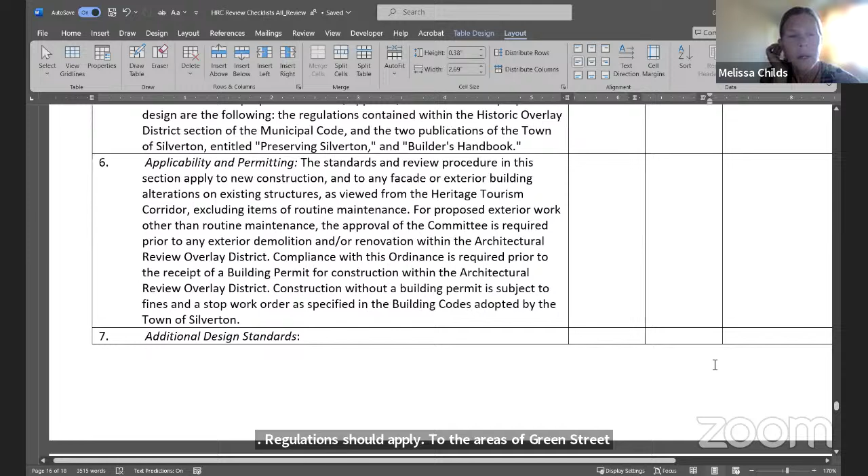Well, I'll comment that I don't think the historic regulations should apply to the areas of Green Street outside of the historic zone, because then we're having everybody mimic the architecture rather than complement it. But I do think there should be regulations. So I am still in favor of no blanket regulations - well, with few blanket regulations.

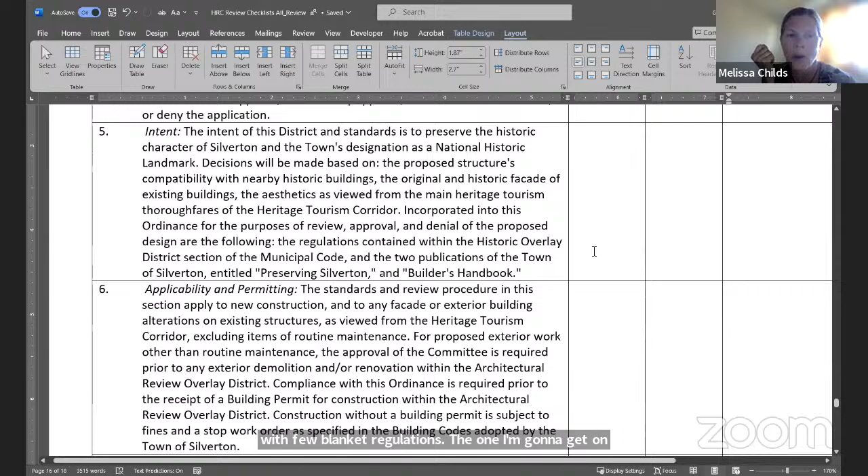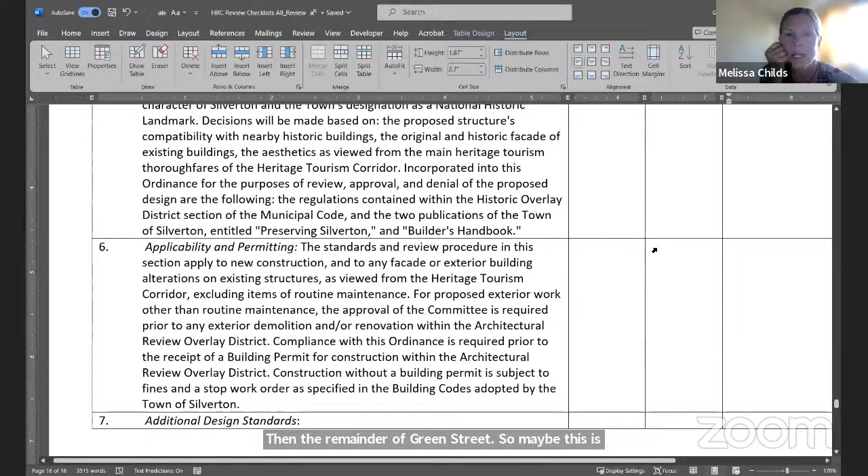The one I'm going to get on a soapbox about is reflective materials - I think we need to be careful with that throughout the entire town. But otherwise, I think the historic downtown is tiered differently than the remainder of Green Street. So maybe this is more work, but I think we need two different zones there, as you refer to them as tiers. I think we need that.

For example, you shouldn't have to have recessed openings on a building down by the visitor center, right? That's outside of our pedestrian zone. So as an example of how the regulations may differ.

So when you all look at an application that's only in the AROD and not in the historic district, what do you typically look at?

I think the problem has been that the AROD refers to the builder's handbook. Right, and that's been our catch there, because that does sort of make the regulations the entire street length. So that's where I think the problem has lied, in that reference to the builder's handbook, which is very much the recessed openings, the 25-foot facades, etc. So I like the idea of doing away with the builder's handbook, use the state regulations for our historic downtown, and have some looser regulations for the remainder of Green Street.

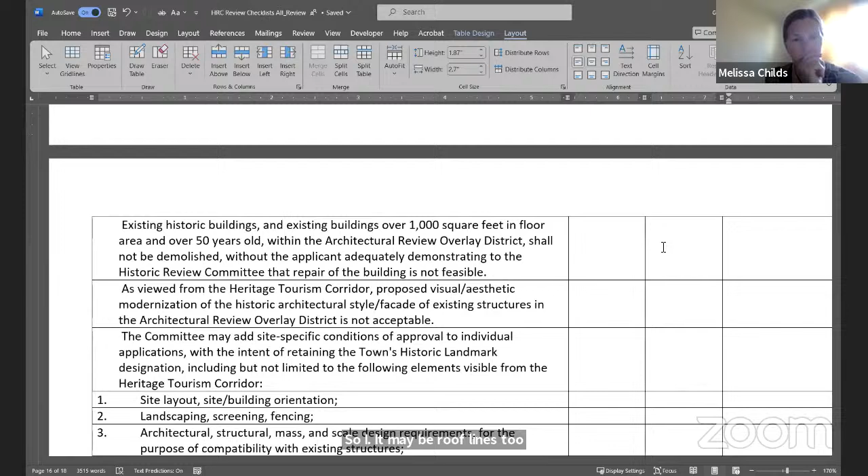I agree with that also.

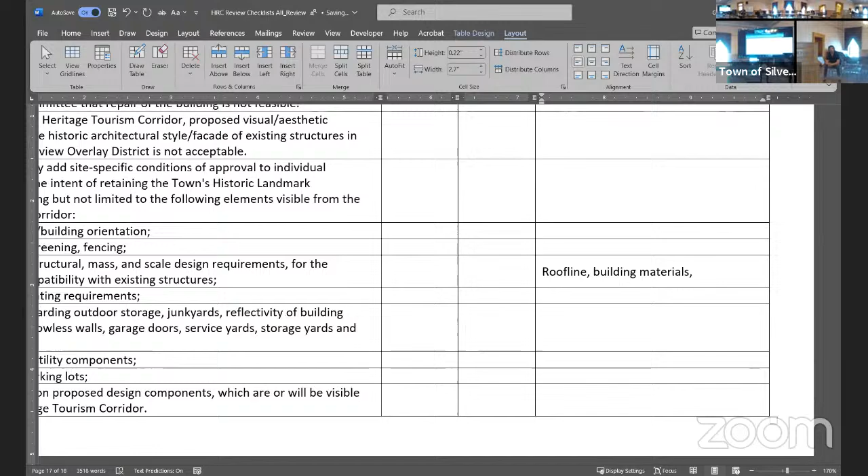There's definitely good stuff in the builder's handbook, and I'm not stating an opinion or position, but it was useful for me. I got references like the form of how the buildings historically were on Greene Street versus Blair, and those kinds of details. So what I'm hearing, just my own perception, is that we're trying to come up with a vision and identity for Greene Street, and what is the passageway into the historic district. This is the right committee to come up with that. So just a comment, I'm not giving any direction or opinion necessarily, just that I found that vision document to be quite useful for me personally. But I'm not necessarily in favor of keeping it, just some direction from the committee to the building community about what should happen, rather than just what's not permitted, could actually be useful.

Thank you. I think we need to be more, all our handbooks, guidelines, everything needs to be more compatible, but I think we're working on that. So that'll be a problem that's going to disappear, hopefully.

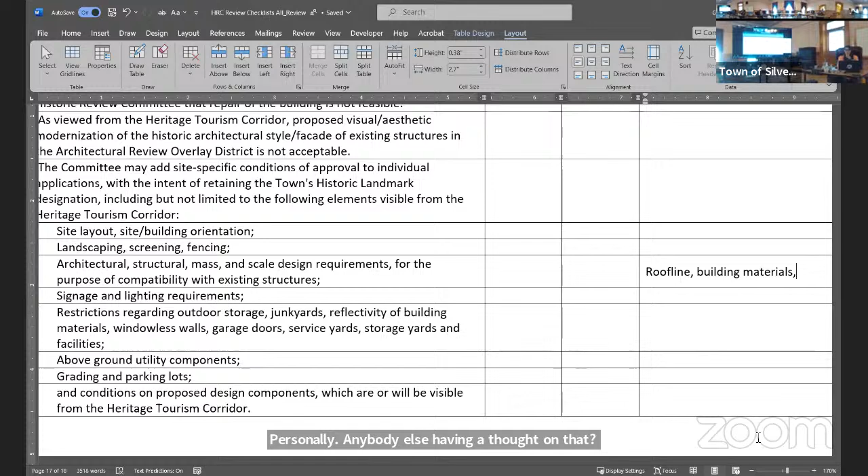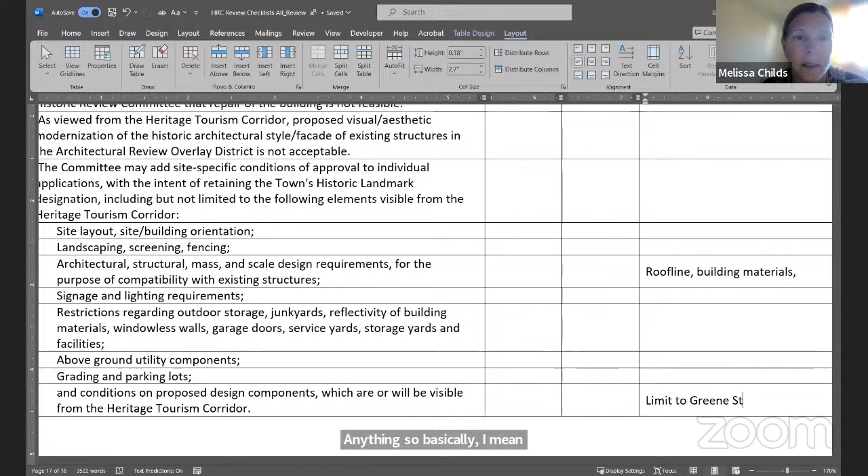Anybody else having a thought on that? I agree, I think Greene Street is appropriate. Well, where are you talking about - starting at the grocery store or starting at those homes? Melissa, anything? So basically it starts down there on 5th Street, right? So basically when you come off the highway, you're no longer on 550 and you're on Greene Street. So the second you're on Greene Street, then I think that AROD should apply. I agree.

Well, keep in mind, we're having these conversations, and what that means is we're going to draft something. And that something might not be exactly what we're all envisioning here, right? Because we're just talking. But it is something for you all to react to and think about, and then maybe think about a different way, and then we can adjust it again, especially since this is a new approach. I just want you all to know that what you see in the next draft is not set in stone. It's just going to be an interpretation of these conversations, hoping to move us forward in the process.

I think what you will see in the full draft of the land use code is an updated historic overlay district that reflects our keep, delete, modify that we did at the beginning. And then a new approach to design standards, where there's going to be this corridor, Greene Street specific, outside of the historic overlay. The minute you get in the historic overlay, those standards kick in. So that is what you will see in the draft.

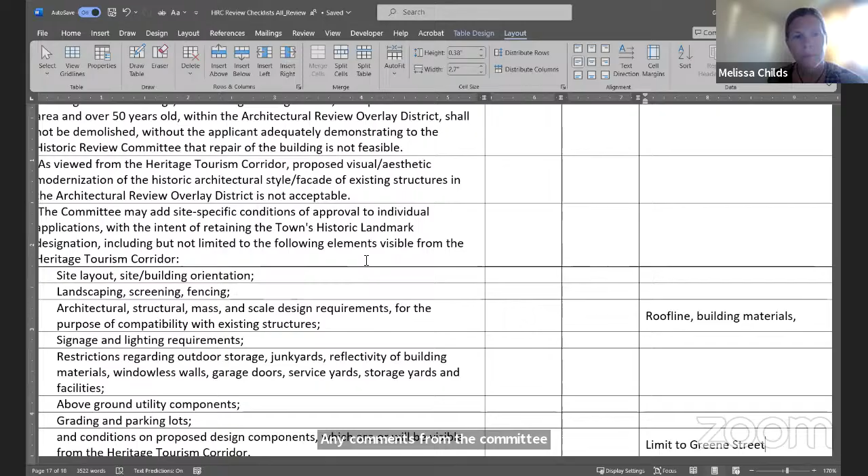Okay, so next on the agenda here is reports. Do any members of the committee have any related reports, announcements, updates, or communication they'd like to share at this time? And Melissa, we amended the agenda to put an item right after this one in committee business to discuss the vacancy. Oh, okay, so can you give us a little outline of that?

Yes, so as you all know, David Pollitt has resigned from the Historic Review Committee, so we have a vacancy. General procedure would be to move to our alternate, but Mike has informed me that he would like to stay an alternate, which I absolutely respect and understand. So thank you for that. So we are going to solicit a spot to get a new member.

That will go to the Board of Trustees on June 24th, and then after that's reviewed, that will go out to the public June 25th. But start telling your friends. And then we will request to have those applications back in by July 5th to review them at the July 8th Board of Trustees meeting, in hopes to have a full committee by our July 9th meeting.